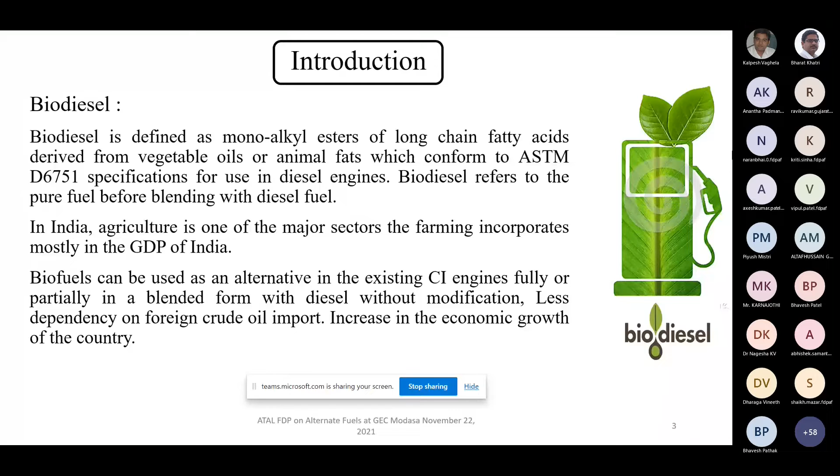However, the calorific value of biodiesel is slightly lower, but it is in the range of diesel. And there are several differences in the physical, chemical, and other properties because they are obtained from different seeds. Biodiesel has some merits, like no sulfur content compared to diesel. It is non-toxic, biodegradable, and can act as a natural lubricant as well.

And biodiesel has a slightly higher flash point and fire point compared to diesel, which makes it a safe fuel. So you can transport and store it easily. It will not catch fire at a lower temperature, having a higher flash point temperature.

Moreover, biodiesel reduces friction between engine parts, because biodiesels have slightly higher lubricity, which makes them more efficient as far as friction power or other friction loss is concerned. The production and adoption of biodiesel as a substitute fuel for diesel engines has 3 main benefits. One, it can reduce the economic burden due to petroleum products.

Second, it can decrease the emission of harmful gases responsible for the greenhouse effect. And third, it will make the life of common people better by giving them employment opportunities. So looking at these 3 advantages, we have taken up this study. And the main targeted point I'll discuss more is how it reduces emissions or greenhouse gases. In that way, this fuel is more important.

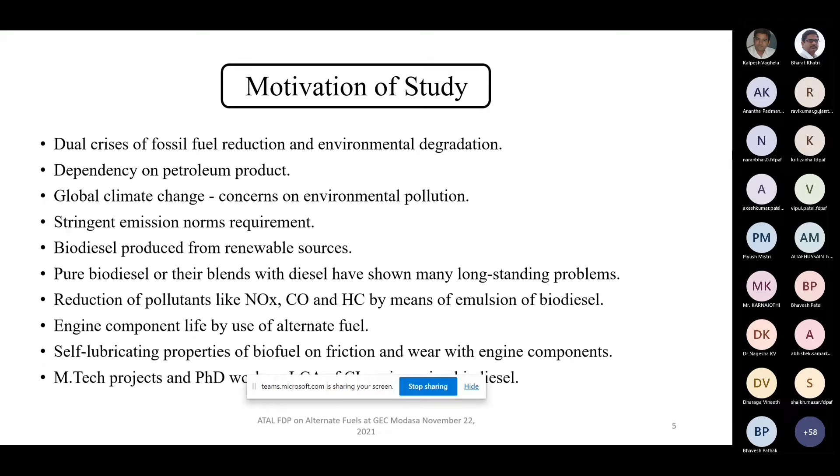As we look at the problem statement, in line with what we discussed, diesel and petrol are the most used fossil fuels and cause huge emissions. As I said, 20% is the contribution of transport fuel. The probable solution to this problem is to use alternative fuels, which produce environmentally harmful gases in lesser quantity. Biodiesel has many sources, and from these different sources, different biodiesels are obtained. And it is important to find the best possible combination of mixing two biodiesels, which can be used as an alternative fuel in automobiles.

So in this entire talk, rather than mixing a single biodiesel with diesel, I'll be highlighting the results with at least two biodiesels mixed with diesel, and the possible improvement in combustion and emission level as well. And I'll also discuss why we selected two rather than one biodiesel.

Next is the acidic content present in biodiesel and the high corrosion rate of metal in the long run in CI engines. Due to the high corrosion rate and acidic property, engine life reduces, and it affects the main components of the engine. So this study would be helpful. Working on all these problems, it has been decided to work on the corrosion property of biodiesel, to see if it can decrease the corrosion rate and find a suitable biodiesel which can be used in the long run in CI engines.

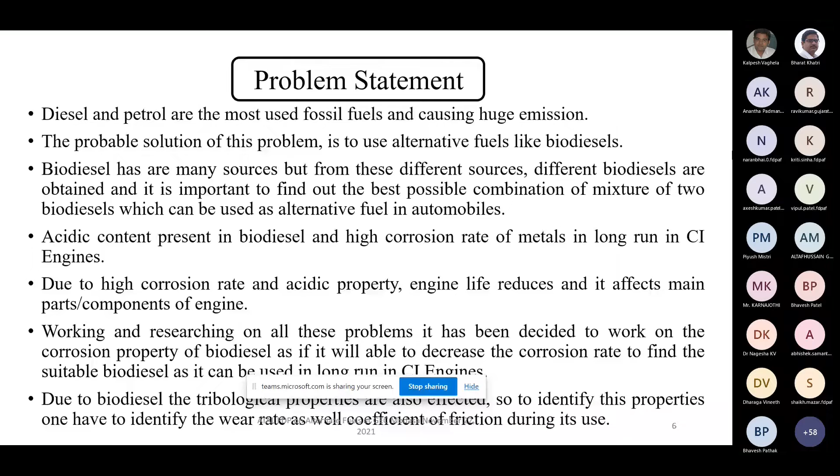So why we need to mix two biodiesels? One important point is less dependency on a single crop-based biodiesel fuel. At a given location, several seeds or crops may be available from which we can get biodiesel, reducing dependency on a single crop. Sometimes it could also be a seasonal problem, as a particular crop may not be available throughout the year for the entire region.

So depending on availability, whether seasonal or local variation, we can mix more than two biodiesels. As far as physicochemical properties are concerned, unlike diesel, all biodiesels have different properties. Some may have better density, some better lubricity, some are less corrosive, some give less frictional effect. If we know all these physicochemical properties, we can determine which two biodiesels are best to mix to get advantages in performance, combustion, and emission. Availability of biodiesel crop throughout the year is also one reason for mixing two biodiesels.

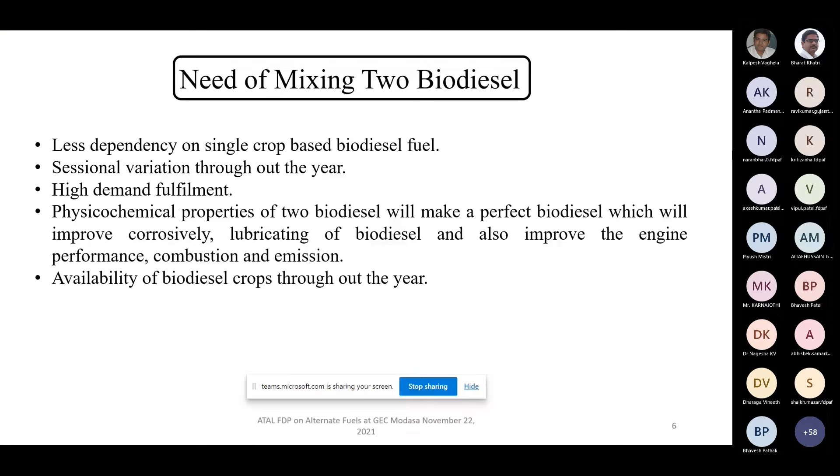So we did some literature review. I won't discuss in detail what literature is available, but to arrive at the final conclusion of this talk, we divided this session into 5 different topics.

A lot of literature was reviewed in terms of engine output with dual biodiesel, where we reviewed papers on the effect of dual biodiesel on fuel property and on engine output. However, we could not find much literature on this topic, though some is still available.

The second part of the literature is fuel optimization by multi-criteria decision method techniques like Promethee, TOPSIS, MOORA, AHP, ANP, VIKOR, etc. We focused on the first two, since a large number of biodiesels are available and we need to mix two - so which two, and why those two? We need to optimize that, and we did this optimization with the help of Promethee and TOPSIS. However, literature is available on other techniques as well.

The third part of the literature is on engine output with emulsified fuel. We tried to understand if we mix water, to the extent of 1 to 5%, in diesel, whether it could improve properties in terms of emission, performance, or combustion. So we reviewed literature on stability of emulsified fuel and its effect on engine output.

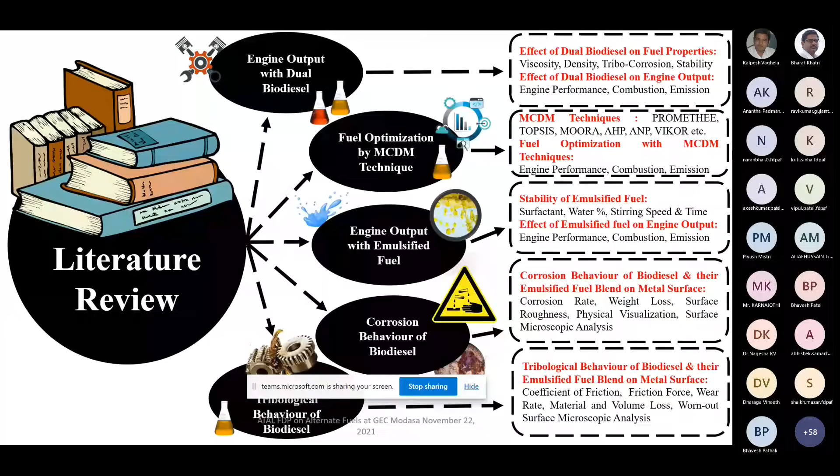So in a broad sense, the total literature was reviewed, and based on that we arrived at some conclusions. These conclusions are: optimization of fuel can be performed using multi-criterion decision making techniques based on engine output, and multiple mixing of biodiesel can reduce engine emission - this is also available in cited literature. Mixing various biodiesels will reduce dependency, and some crops of biodiesel are highly corrosive.

Mixing of various biodiesel will reduce the dependency. Some crops of biodiesels are highly corrosive. Biodiesels are more corrosive than diesel, and the corrosiveness of biodiesel can be reduced by blending them with low corrosive biodiesel - so if you mix it, the effect can be nullified.

Biodiesel has potential as a self-lubricating fuel or lubricant, and multiple biodiesel blend fuel has potential to reduce engine wear. However, with the addition of biodiesel in petroleum lubricant, it can reduce lubricating properties, and emulsified fuel combusts more efficiently, also producing higher brake thermal efficiency. These are some of the conclusions from the literature review.

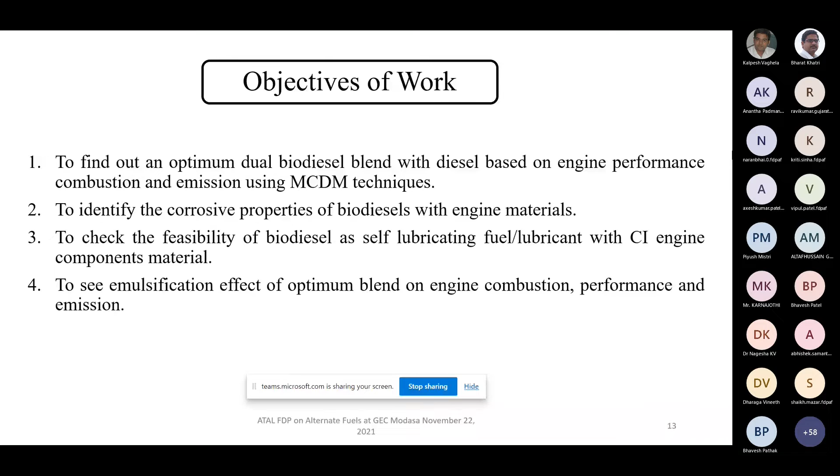So these are the 4 basic objectives. One is to optimize the blend based on our MCDM techniques. Then to identify the corrosive properties. Third is to check the feasibility of biodiesel as self-lubricating fuel in the CI engine. And last one is to see the emulsification effect - what if we add a slight amount of water into the engine on combustion performance and emission.

So first, as I said, the first part is the selection of biodiesel. If we want to mix them, we need to identify some biodiesel and then try to mix. So first we selected some biodiesel samples based on the property. They were analyzed through GCMS and FTIR based on availability and based on tribocorrosion or corrosion property from the literature. Some biodiesels were selected. Then all these biodiesel blends were typically analyzed through engine performance analysis - CI engine test on the CI engine test rig, performance analysis, combustion analysis, emission as per IS 10,000 part 4.

Then as I said, we add a slight amount of water, and again performance, combustion, emission analysis was targeted. Then with this blend of biodiesels, corrosion analysis was understood.

For that we selected the metal, then static immersion test was performed, and on the basis of visual inspection, weight loss analysis, and surface roughness through surface roughness tester and scanning electron microscopy, we identified the corrosion level in different metals as well.

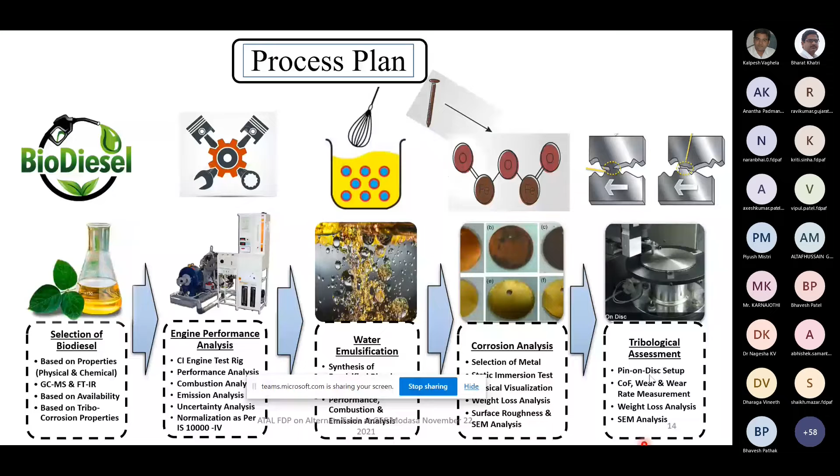And finally, we went on to pin-on-disc apparatus experimentation, where we found out the metal's affinity with the biodiesel in terms of coefficient of friction, wear rate measurement, weight loss analysis, etc. So this way we have moved from selection of biodiesel to finally tribological assessment or analysis. This is all about the selection of biodiesel.

So we know, different seeds are available from where we can generate biodiesel in different quantity in different states of India. If I talk about Jatropha, it's available in Andhra Pradesh, Chhattisgarh, Rajasthan. Castor in Gujarat, Rajasthan, Andhra Pradesh. Neem is available in plenty in UP, Bihar, and West Bengal. Linseed is available in Madhya Pradesh, Karnataka, Chhattisgarh.

Karanja is available in plenty in UP, Bihar, and Orissa. Same way, rapeseed is available in plenty in Rajasthan, Uttar Pradesh, Haryana. Palm in Andhra Pradesh, Gujarat, and Karnataka, and canola is available in Rajasthan, UP, and Haryana. So you see, different crops are available in different states of India.

If we generate biodiesel, it's difficult to transport it from one place to other, looking at the transportation cost. So normally we target the region-based or state-based biodiesel availability, and you can see in one state more than 2 or 3 seeds are available wherein we can generate the biodiesel. So we took these 8 different species from where we produce the biodiesel, and those biodiesel studies are further discussed in this presentation.

So this is physical chemical properties. Now you see here, more or less viscosity is in line with the diesel, but more important is the calorific value. Diesel's calorific value is about 42 megajoules, and almost all biodiesel calorific values are in line with diesel except Karanja and rapeseed, where this calorific value is slightly lower, and we know that if calorific value is less, your brake specific fuel consumption would increase. So you require more amount of fuel to get the same power. Density is almost the same - from canola to castor, the variation is much less.

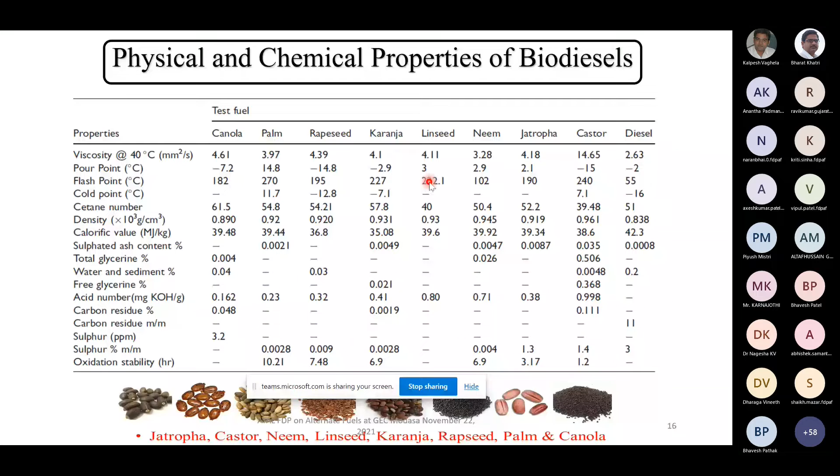So the first part of the talk is the selection of optimized biodiesel blend using multi-criteria decision method techniques. To arrive at the best blend, we started initially with all 8 biodiesels, whatever were presented in my earlier slide: Jatropha, castor, neem, linseed, karanja, rapeseed, palm, and canola.

These 8 biodiesels were selected and tested for 3 criteria. One is performance, where we selected brake thermal efficiency and brake specific fuel consumption. For combustion, we took maximum pressure and delay period. For emission, 3 emissions were targeted which are most crucial: NOx, HC, and CO. Based on that, we tried to optimize.

As far as engine load weightage is concerned, engine may run from 0 to 100% load, and most of the lifetime it runs at 50% load, and accordingly this weightage was selected. Finally, to arrive at which biodiesel is best, the parameters like performance, combustion, and emission were also given different weightage. More weightage is given on emission.

So 50% of the selection weightage was given on the emission criteria, 25% on combustion, and 25% on performance. We have 3 different indices for emission; total weightage is 50, so each one is given about 0.167. Combustion is given 25%.

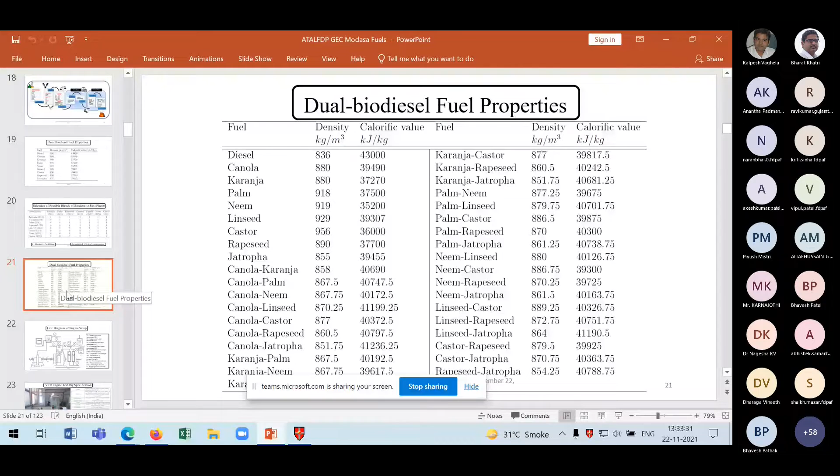This gives the property of density and calorific value of all these 8 samples.

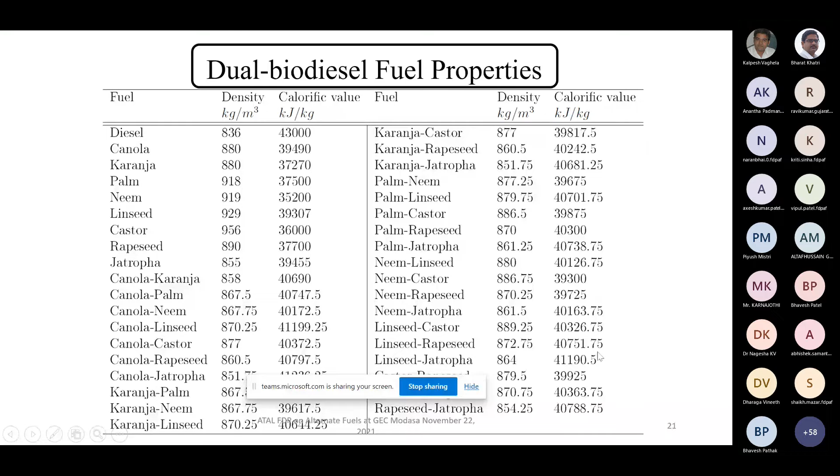So all these 28 combinations were tested. Here you can see, along with the pure diesel and pure biodiesel, the properties density and calorific value for the mixture are also mentioned. If you mix it, the calorific value has slightly gone up in some cases, because the calorific value of some biodiesel is more compared to others. Almost in all cases, the CV value is in line with diesel: if diesel has 43, here it is ranging from 39,000 to about 41,000, and density is also in line with the diesel.

This is our experimental test setup. It is a computerized variable compression ratio engine test rig, and here an electrical dynamometer is given. By varying typically the flow rate, all sorts of results were taken, and they were captured through an online data recording system as well.

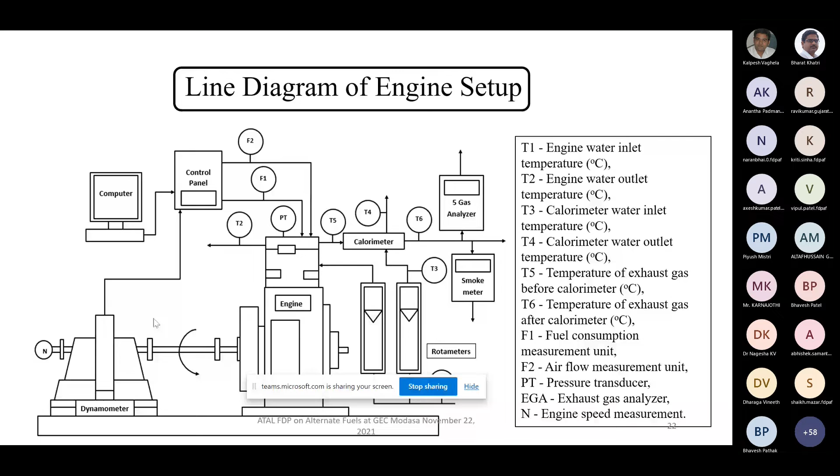This is the pictorial view of our existing VCR system, sorry, variable compression ratio engine test. For emission, we measure carbon monoxide, HC, CO2, O2, and NOx. This 5-gas analyzer was fixed in the tailpipe, and it could give us an accuracy of 5%. For smoke, we measure the opacity, and the accuracy is in the range of plus or minus 0.1 meter inverse. These equipments were used in the experimental setup.

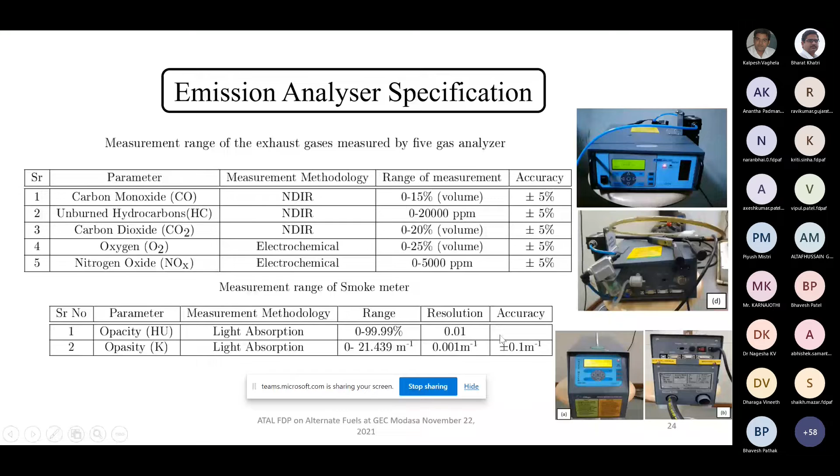Now, as far as load factor is concerned, as I said, we arrived at loading conditions from 0 to 100%. Here you can see that the maximum load factor is given to 50% load. That is, a 0.6 weight factor is for 50% load. A 0.15 load factor was given to 25% and 75% of engine operation. And we know the engine hardly operates at 0 and 100%, so this load factor was set as 0.05 and 0.05 respectively.

This is taken from the United States Environmental Protection Agency standard, where they have mentioned that the engine load factor is typically 0.59 for most of the time of the entire life. In line with that, we have selected 0.6 for 50%.

As far as the engine operating condition is concerned, our engine was fixed at 1500 RPM. Loading condition was varied from 0 to 100% in intervals of 25. Injection timing was 20 degrees before TDC. Temperature was about room temperature, 25 to 30 degrees centigrade. Compression ratio was fixed at 18:1. However, we have flexibility in our engine setup to vary the compression ratio from 16 to 19, because it is a variable compression ratio engine test setup. Injection pressure was set at 220 bar.

With this, we used these 28 combinations, as I said, from canola karanja to rapeseed jatropha. Our target was to select the best mix out of these, so that we can take 25% each of two biodiesels along with 50% diesel. In most of the literature, it will be 80% diesel and 20% biodiesel. But here we have targeted 50% diesel and 50% biodiesel, wherein two biodiesels were mixed in a quantity of 25% each.

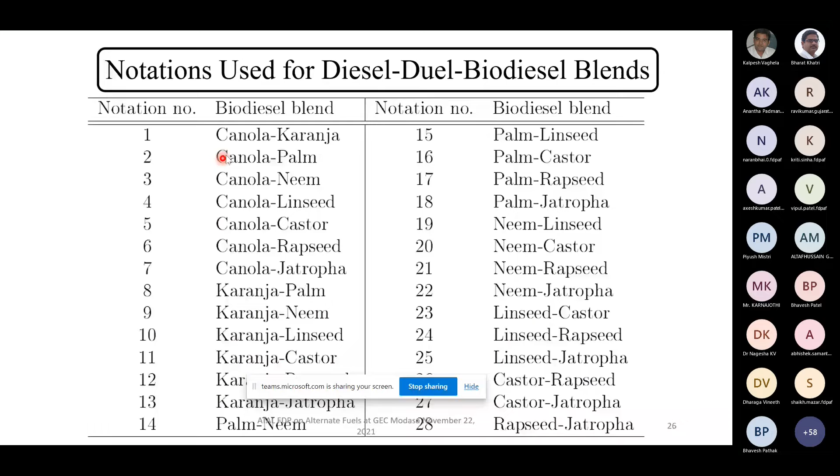If you look at the performance analysis of each individual combination, on the x-axis you can see 1 to 28, in line with the notation numbers given in the previous slide. 1 corresponds to canola karanja and 28 corresponds to rapeseed jatropha. This is the performance analysis, where we took two different indices: brake thermal efficiency and brake specific fuel consumption.

The maximum efficiency was with biodiesel mixture 19, which is neem linseed. You also have better results with number 5, canola castor, and number 9, karanja neem, and the lowest was with 25, linseed jatropha. Through this we come to know that some biodiesels give brake thermal efficiency of the order of 25%, while for other biodiesels the efficiency is less by 5%, in the range of 20 to 21.

Then we went for the combustion analysis. Here the delay period should be lower, whereas the peak cylinder pressure should be more. Ultimately, more peak cylinder pressure will give you more torque, and your brake power would be more. At the same time, the delay period should be shorter.

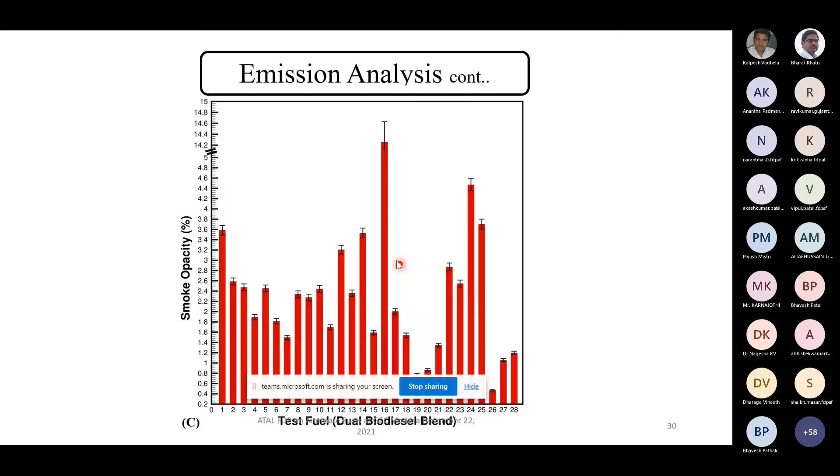In emission also you see here number 26, that is the castor rapeseed, has got the lowest. 19 and 20, that is neem linseed and neem castor, also have better property in terms of the smoke opacity emissions. Now here the weightage for the smoke opacity is 16%, hydrocarbon emission also 16%, 16% for nitrogen oxides. So this is my overall matrix.

If you see whatever I have described, the weightage for total emission is 50%. Okay, so this weightage is fixed, as discussed earlier. However, in terms of the emission, lower is better. We should have low emission, but at the same time, as far as Pmax is concerned, it should be high. Delay period should be low and thermal efficiency should be high, right? So for some of the parameters lower is better, for some higher is better.

So ultimately, see this weightage, right? Weightage is given for the different criteria, and whatever results were highlighted in these 7 charts are mentioned over here in numbers. For all the alternatives A1 to A28: the emission level in ppm or percentage, Pmax, delay period and thermal efficiency. Interestingly, you can see that I have not mentioned brake specific fuel consumption, since thermal efficiency and brake specific fuel consumption go hand in hand: higher brake thermal efficiency means lower brake specific fuel consumption. So thermal efficiency is given 25% of the weightage. So this is the total matrix for all 28 combinations.

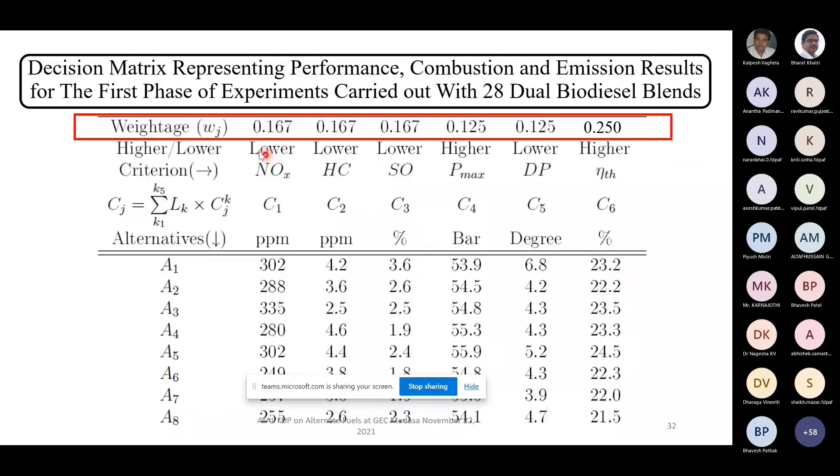So ultimately what I am doing is multiplying r, which is the revised number, with the weightage factor. So all these weightages w1 to w7 are multiplied, and you will have the weighted normalized decision matrix. Then this particular matrix will have 7 columns and 28 rows. So out of these 28 numbers, you can find one number which will be maximum and one number which will be minimum.

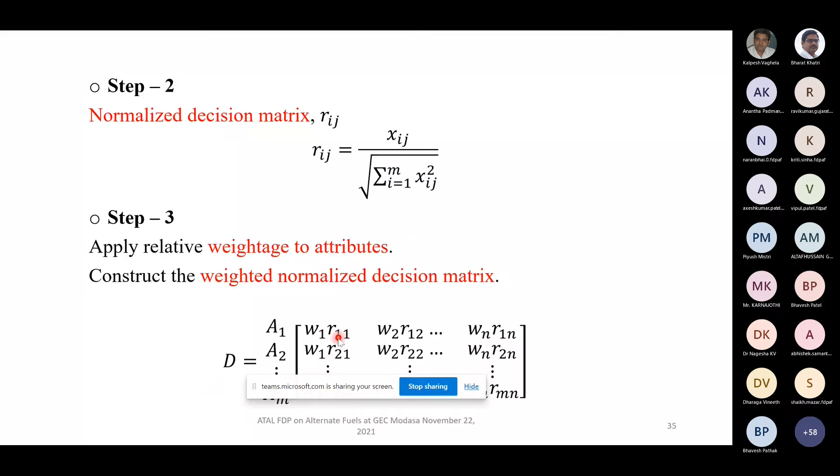So we need to identify this A plus and A minus. A plus is typically the maximum number in the given column, out of these 7 columns. So you have 7 maximum and 7 minimum, which will be marked as A plus and A minus. And then with respect to that, we'll perform this Vij minus Vj, take the square, and make the summation of that.

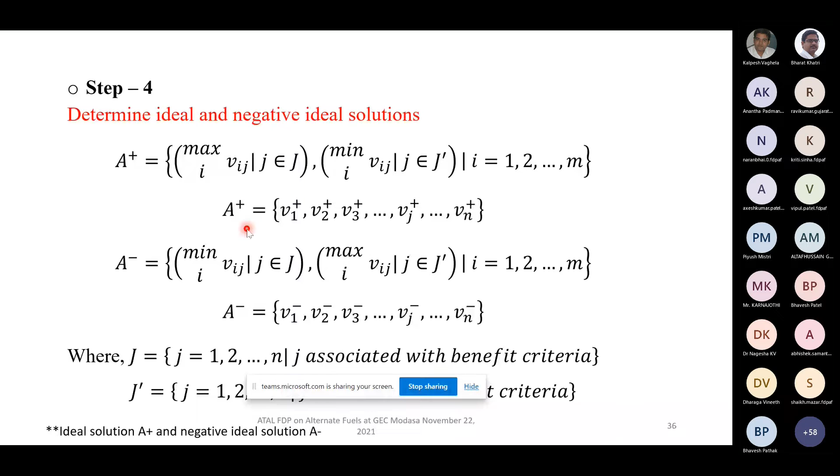So whatever matrix you have, you take the A plus. A plus covers all your 7 results in this matrix. Whatever is the maximum number will be A plus, whatever is the minimum number will be A minus. So at the bottom of this A28, I have A plus and A minus, and correspondingly I have 7 results. Then every individual number will be subtracted from this A plus or A minus, and then we'll take the square root.

So you see here, Vij minus Vj, I am going for the ideal negative and positive separation. When I subtract all the 28 cross 7 elements from Vj plus, square it and take the square root, you will get a single number with respect to that particular column, which will be Si plus, and similarly you will have Si minus as well. So we get the calculated separation from the ideal positive and ideal negative solution.

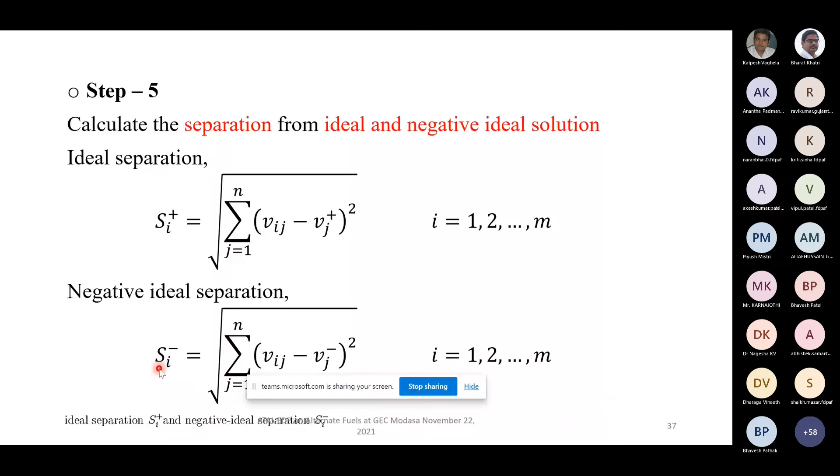So you have one set of matrix as Si plus, one as Si minus, and using these two I'll have a single matrix of Ci. This Ci will be a one-column matrix having 28 rows. Every individual combination A1 to A28 will have a particular Ci, and here you can see all 28. Finally this C star will be a single number for a given alternative; the maximum will be the best alternative, and the minimum will be the least one.

So using this TOPSIS, I can conclude that combination number 26, which is my castor rapeseed, is the best solution. Second best is Palm Linseed. Third best is my A17, which is Palm and rapeseed. And likewise, I have numbers from 1 to 28, so you can put all these 28 blends in order.

So using this multi-criteria decision matrix, the TOPSIS method, I have arrived at the best possible solution, that number 26, castor rapeseed, is the best, given that 50% weightage is given to emission, 25% to combustion, and 25% to performance. So with all that we have discussed so far, various experimentation and various matrices, I could arrive at the ranking from 1 to 28 by the TOPSIS method.

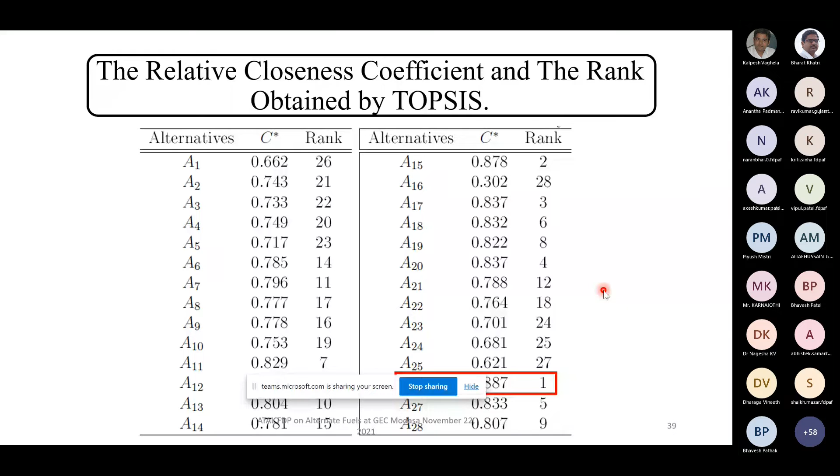However, we should ensure that our ranking from TOPSIS is not biased, so we took another method as well. The next method is PROMETHEE, the preference ranking organization method for enrichment of evaluations, which is again a matrix-based method. I'll not discuss the steps involved, but typically we go for the matrix formulation, and arrive at the multi-criteria preference index matrix for all

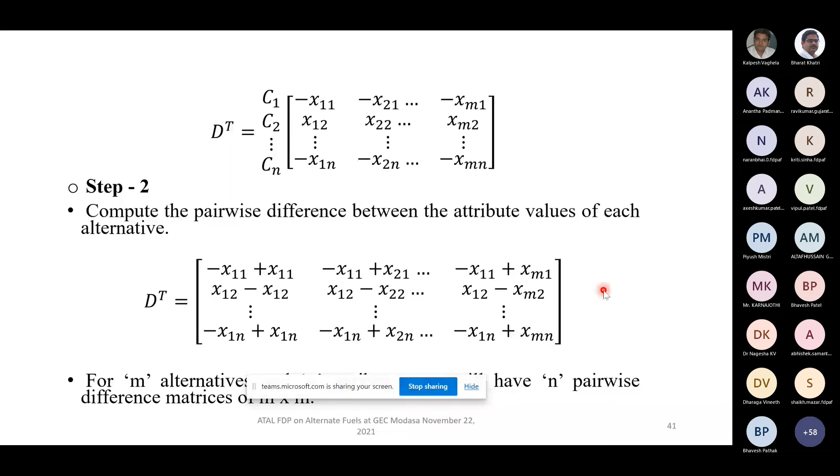28 combinations. Then in step 3, we perform the multi-criterion preference index, then the outranking and outranked index, and finally we arrive at a single number here, just as C star was your ranking decision performance parameter.

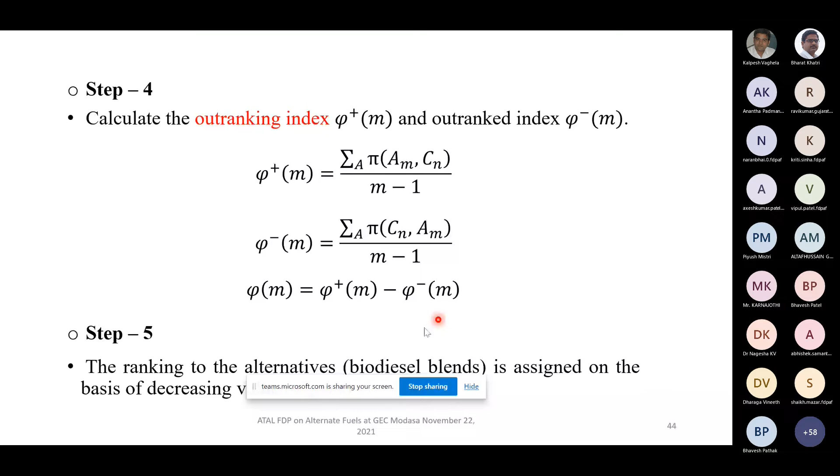Here this phi-m, which is the outranking and outranked index, on the basis of that we arrive at a single digit number phi-m for the given option. And if we put this phi for all these combinations, whichever is having the highest phi, highest performance, would be the best matrix.

So again, ironically, we got the same, that is blend number 26, which is castor rapeseed, as the first rank. However, it is not true for the others, that is second, third, fourth, fifth, etc. There is a slight change. Whatever was second in the earlier case is not the second over here. You can see now second best is neem linseed, whereas in the earlier case it was palm castor. So here using PROMETHEE and TOPSIS, we got the ranking of these 28 blends.

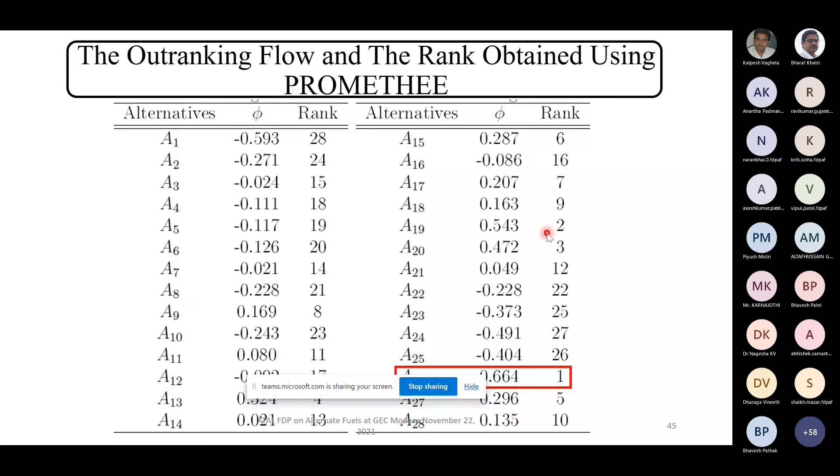So if you have two different values from two different criteria, the Spearman rank correlation method gives you the optimum solution. It is indicated by rho, and the value will be in between -1 and 1. If rho value is -1, it gives you poor correlation. If it is +1, it gives good correlation. So if your correlation is more than 0.8, 0.85, we accept that particular correlation. Otherwise, we reject.

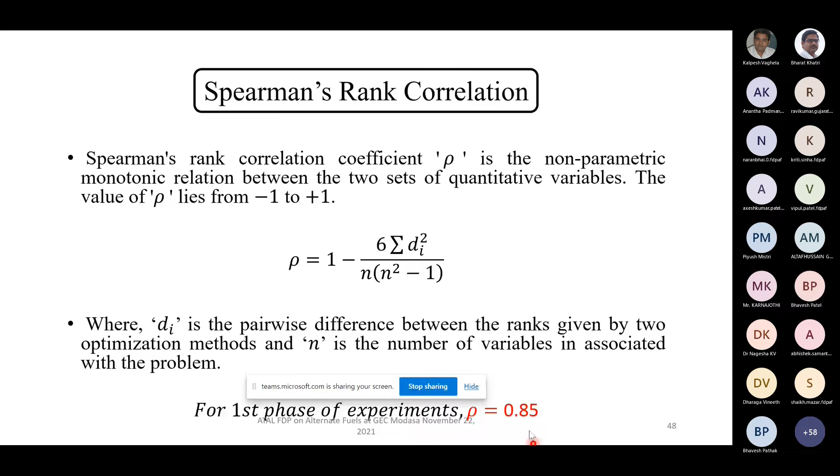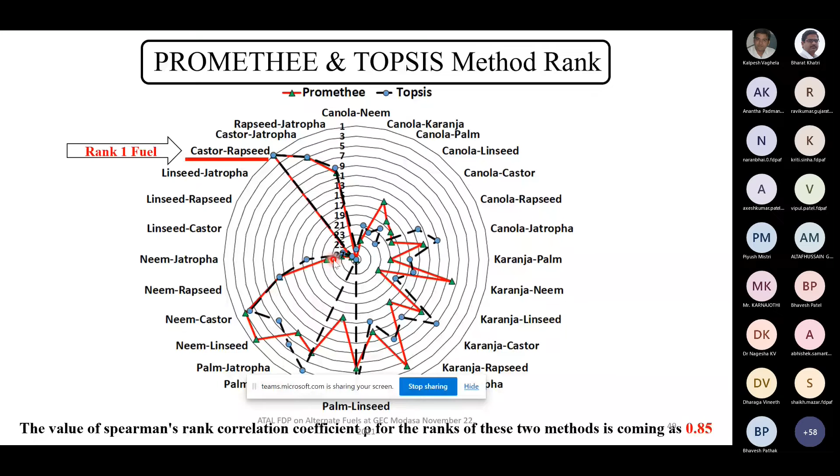So if you see here, as I said, in order to perform the further experiment, it was decided that this particular mixture of castor and rapeseed will be varied. Because we need to find out what is the correct mixture, whether we should take 50-50% of these two, or 20-80% or 40-60%.

So 5 different scenarios were selected. For instance, we take diesel blend as 70% fixed, but as far as this biodiesel blend is concerned, it was taken as 30. Looking to the fact that this mixture would give us better flexibility, rather than establish an 80-20 blend, here we went for the 70-30.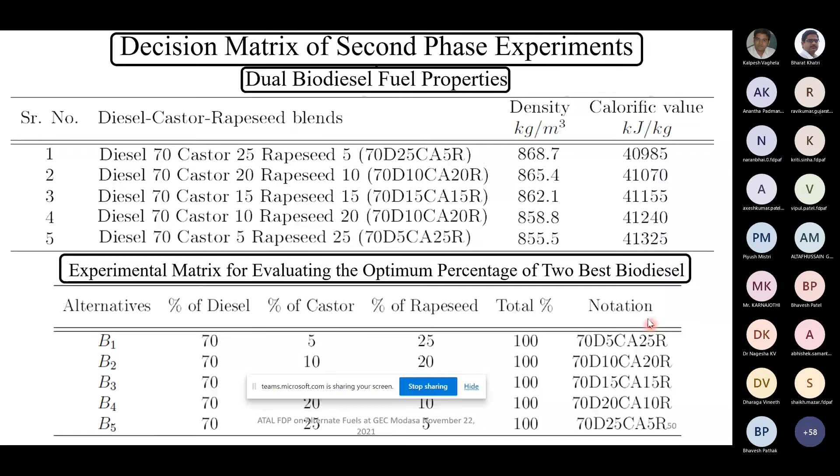Now here in the second phase, I'll try to optimize the proportion of these two, whether it is 15-15 or 5-25 or 10-20. So again, the same criteria were selected: performance, combustion, and emission. Performance analysis straight away says that B5 is the best. Your brake specific fuel consumption is the least, whereas the brake thermal efficiency is more. And B5 is 25% Castor and 5% Rapeseed. This is best in terms of performance.

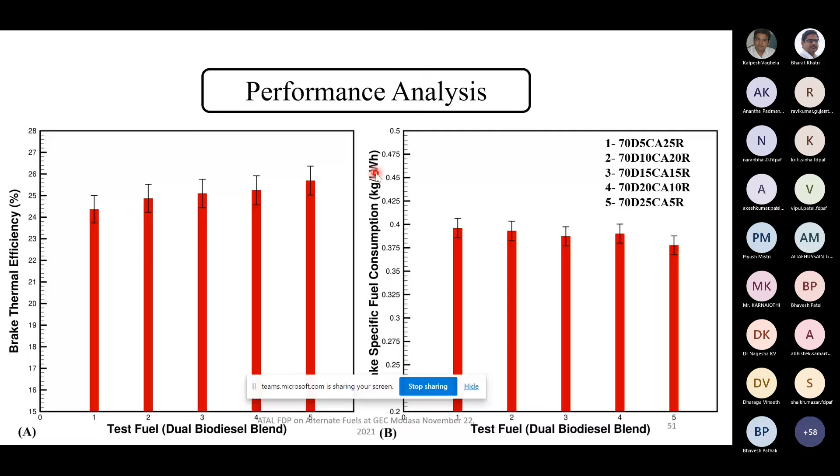In terms of combustion, my delay has to be minimum and peak cylinder pressure has to be maximum. So minimum delay is with respect to B1. So looking at the delay period, or combustion analysis, 70% diesel, 5% Castor, and 25% Rapeseed is the best. If I go for the emission, see here.

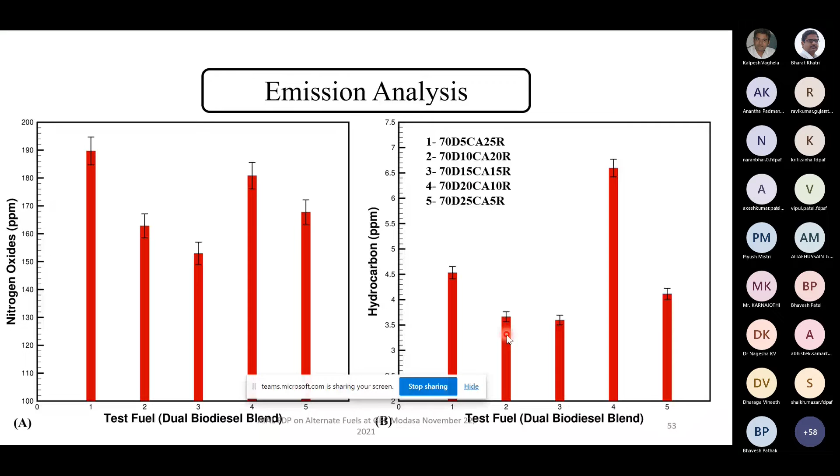In emission, typically 3 criteria are selected: NOx, hydrocarbon, and opacity. In terms of nitrogen oxide NOx, the 15-15 blend is better. In terms of hydrocarbon also, the same blend is better because it gives the least value, because in emission lower is better. And for smoke opacity, the third criterion, it is also better. So again, same criteria: 50% weightage is given to emission, 25% to combustion, and 25% to performance.

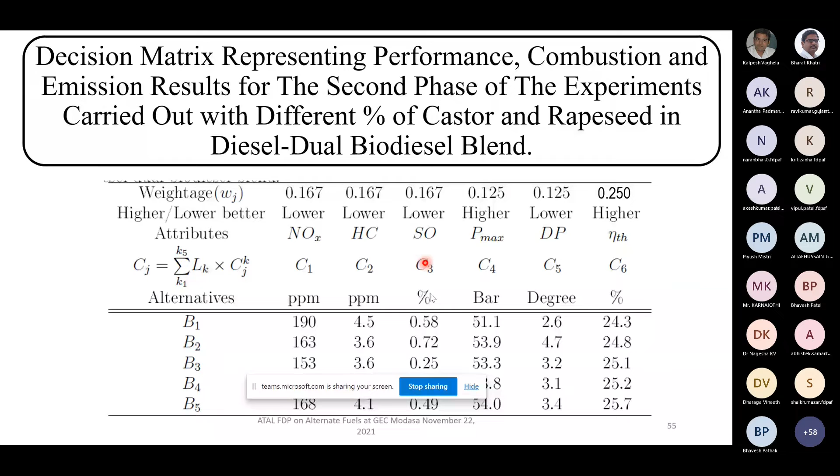Based on that, matrices were formed, both methods, PROMETHEE and TOPSIS, were implemented, and ranks were identified as per the previous methodology. So out of these 5, B1 is ranked 4th as per TOPSIS, whereas PROMETHEE ranks it 5. The difference is 1. We take the di square because for the Spearman rank coefficient we need to use this particular column. For these 3, the difference is 0. That means both methods have given the same optimized blend. Only for the first 2 does the rank differ, by only 1.

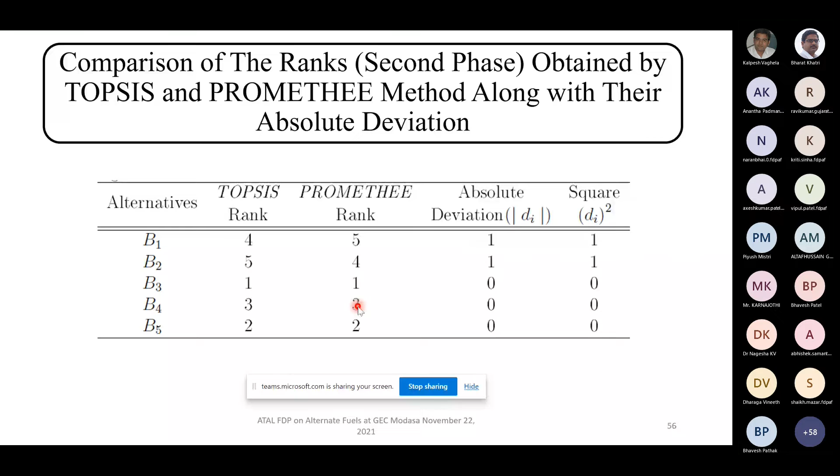So TOPSIS and PROMETHEE for my second phase of optimization give more or less the same results, represented over here. The best blend is 70% diesel, 15% Castor, and 15% Rapeseed, whereas the worst one is 70% diesel, 10% Castor, and 20% Rapeseed. So this second phase of optimization gives me the required mixing in my diesel biodiesel blend: a 70-30 blend, 70% diesel, 30% biodiesel, and in that 30%, 15% Castor and 15% Rapeseed added in equal proportion.

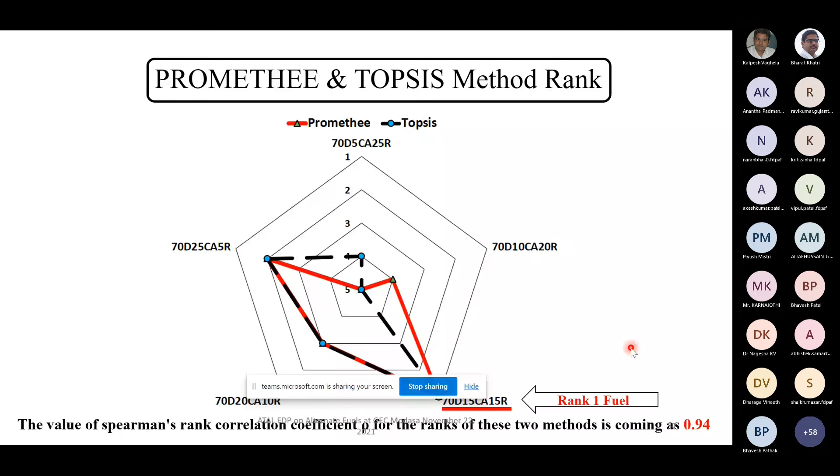And the Spearman rank correlation is 0.94, which is towards 1. So PROMETHEE and TOPSIS are both equally strong to optimize my second phase of experimentation. We went for the uncertainty as well, and the uncertainty is very good in almost all measurements, very low, less than plus or minus 0.1. In percentage also it is very low. So the equipment was calibrated, and uncertainty in measurement was within limit.

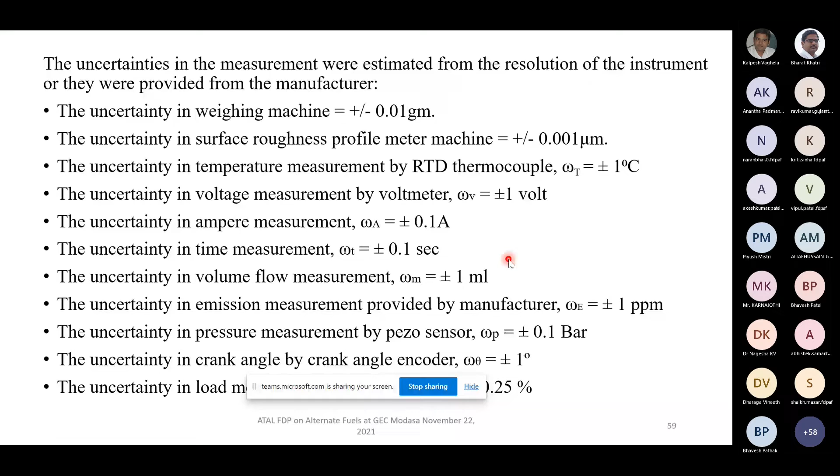As far as the closure of this part is concerned, we did the selection of the optimum blend of biodiesel and diesel based on a multi-choice decision matrix criterion, which gives us 70% diesel, 15% Castor, and 15% Rapeseed as the optimized blend, since it gives lower NOx, lower soot particle, and lower HC as well. Now we need to understand what happens if we go for further modification, the next modification being emulsification.

As far as emulsification is concerned, it is adding water into the biodiesel diesel blend. So henceforth, when I talk about biodiesel, please understand it is a blend of 70-30, where Castor and Rapeseed are mixed equally. So 70D, 15Ca, 15R will now be taken as my biodiesel diesel blend for the further study.

So the next study is water-in-oil emulsification. I add water into the oil, and we will see what happens if we add water into the oil, or water injection in the diesel engine - how could it be useful, what are the ill effects or negative effects, and whether we should go for that or not.

As far as the injection of water, or rather the water emulsification, is concerned, there are 3 ways. Either you can prepare the water-oil emulsion outside the engine, and then inject water and oil through your diesel injection system.

Second is the fumigation of water into the intake air, so along with the air, water is injected and mixed with the air as H2O vapor, and then it is injected into the diesel engine. Third is direct injection into the combustion chamber with the help of an injector.

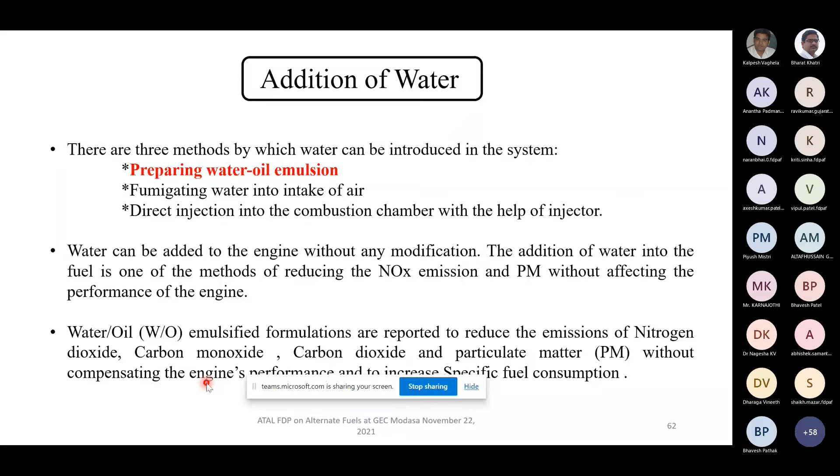So the mixture of water and oil, this emulsified formulation, is reported to reduce the emission of nitrogen dioxide, carbon monoxide, and particulate matter, without compromising engine performance much, and without increasing much of your brake specific fuel consumption. So this is overall the representation of the experimentation of this second phase.

I took the Castor and Rapeseed optimized blend at 15 each, 70% diesel, and then added some water in volume percentages of 1 to 5% and 10%. I'm writing 1-5 because we took 1%, 2%, 3%, 4%, 5% in steps of 1, and then directly went to 10%. We did not take 6, 7, 8, 9. So a total of 6 water samples were selected - 1 to 5% and 10% - and then mixed with this particular mixture.

Now, water and oil density is different, so they will not mix in the required proportion - rather you'll have a demarcation of water in oil, because water being heavier than oil will float... actually water will settle and oil will float. So to have a homogeneous mixture, we need a surfactant, and the function of the surfactant is to create a homogeneous mixture of water in oil.

So we selected 2 commercial surfactants, Tween 80 and Span 80, because of their different properties, and mixed them in some proportion with these 3 components. It was stirred at typically 1500 RPM for 48 hours so that the mixture is appropriate, and then left for 48 hours to check whether the mixture was appropriate, followed by the stability test, then performance test, combustion and emission.

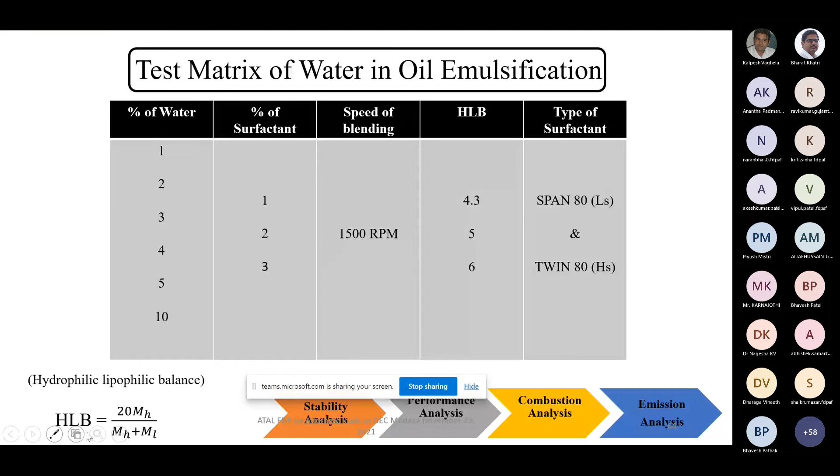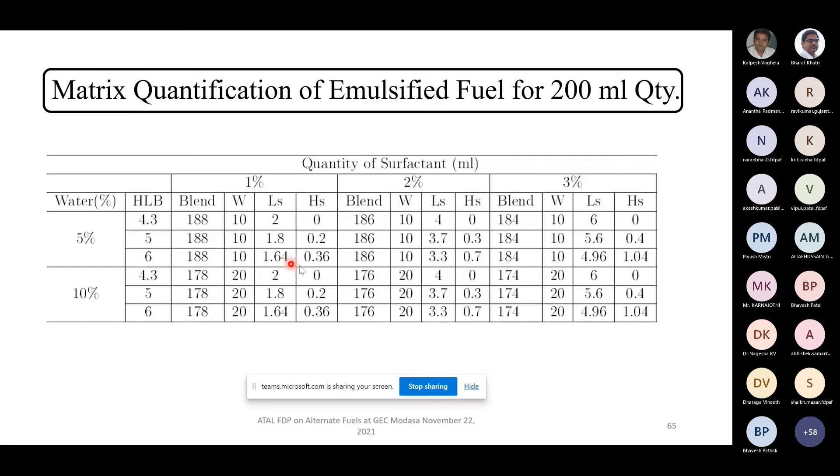To get HLB as 6, I need 1.6 ml of lipophilic surfactant and 0.36 ml of hydrophilic surfactant, so total is about 2, and this is out of 10, so the rest will be my blend. So the blend is varied accordingly. Total volume minus water and surfactant, 200 minus this, will be your blend. So all blends were prepared accordingly and the experiments were carried out.

So this is the property of surfactant. As I said, these are the commercial names, Span 80 and Tween 80. However, they are basically mixtures of carbon, hydrogen, and oxygen in different proportions. Molar mass, appearance, density, and boiling points are mentioned here. These are the two widely used surfactants in the industry for the stability of this mixture.

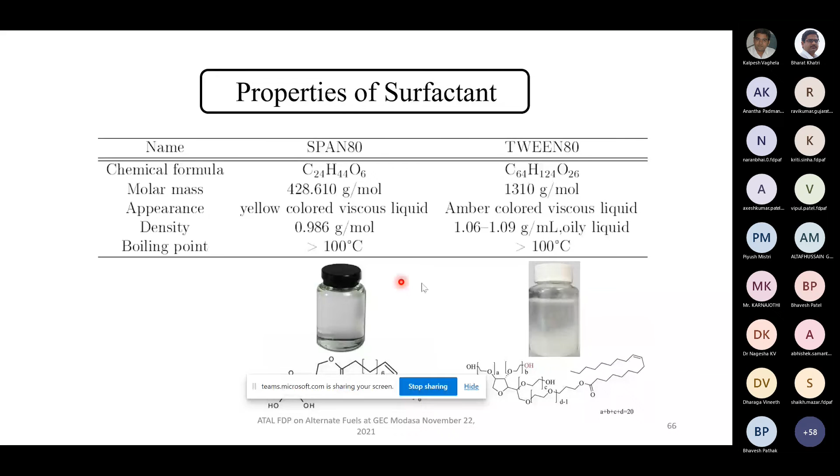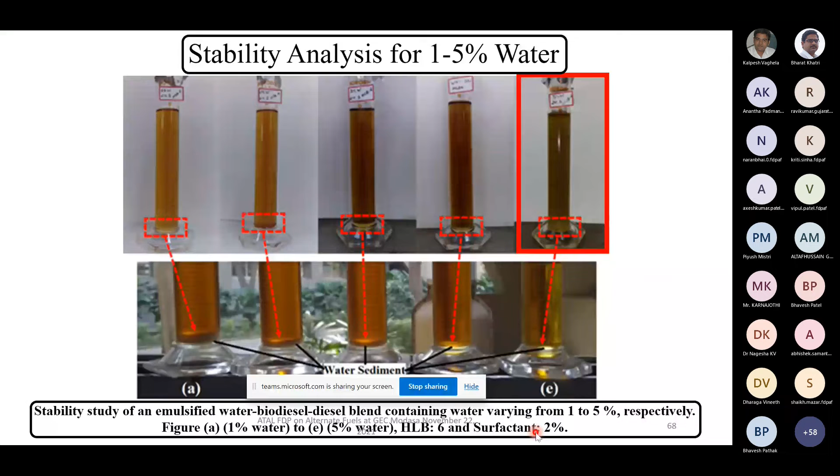However, we need to go for performance combustion, etc. For that, we need the properties of all this mixture. Here you can see all 5 mixtures: 1% water, 2% water, 3%, 4%, and 5%. Wherein these 2 and 6 were common, right? 2% of your surfactants and the HLB ratio of 6 was kept same. This second indicates 70% diesel C15, that is Castor 15 and Rapeseed 15, and first one is the diesel. So all values, viscosity, density, calorific value, flash and fire point, cetane number, etc. are mentioned. Let me clarify that here.

See, with respect to the neat biodiesel, if you find out the cetane number comparison, this cetane number is very good in line with the cetane value of your diesel. So that delay period hardly matters as far as this is concerned. So it is good in terms of that.

As far as calorific value is concerned, almost all these 5 blends have the calorific value more or less same. However, with the increase in water percentage, your calorific value goes down because water doesn't contribute to the calorific value. And viscosity is also in line, that is 16.99 to 16.90. Slight variation in viscosity you can observe, but it is negligible, and so does your density as well.

So these are the different fuel blends which were tested. 7 samples were tested, and this is the composition. As I increase the water percentage, obviously this blend value will be 100 minus addition of these two. So typically 1% water, 2% surfactant, 100 minus 3 is 97, so 97% blend will be taken. Here it is 5 plus 2, 7, so 93% blend will be taken. So these are my compositions for different blends.

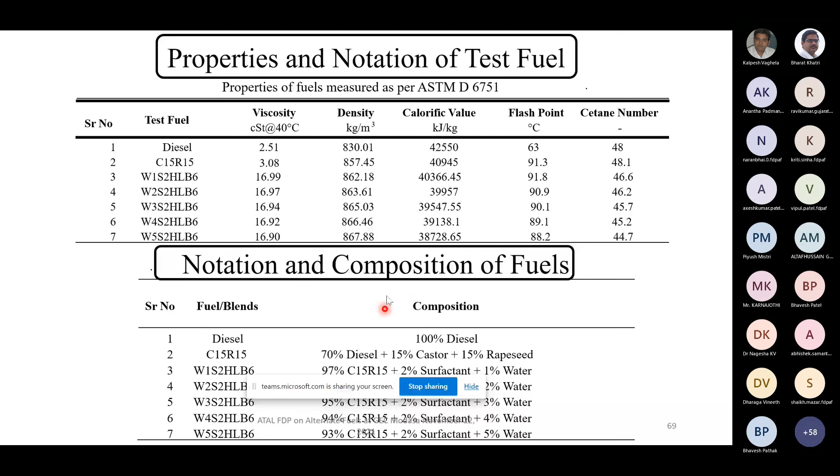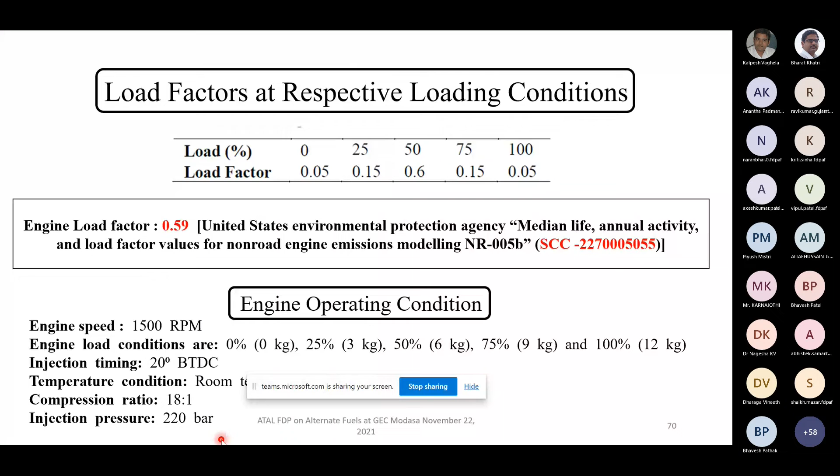Then same load factor was taken, looking to the fact that most of the time engine runs at 50% of load. Conditions were maintained same. And more importantly, I would point out that when we add water into the oil, what actually happens? Why should we add water in a smaller quantity? In the emulsified fuel engine, the water has a lower boiling point compared to diesel. Water boils at 100, but diesel doesn't.

So during the combustion, compressed heated air in the combustion chamber transfers heat to the water droplet along with the atomized primary fuel. So here you see there will be a fuel droplet. Water droplets are captured over here within the fuel. Both are having different boiling points. Boiling point of water is less, so it will pick up heat faster and there will be a blast. So rapid evaporation of the water will break down this whole particle into smaller particles.

So your larger fuel particle has fragmented into smaller fuel particles. From a surface area point of view, the surface area of a larger droplet is fairly less compared to the total surface area after fragmentation. So your heat transfer rate would be faster. So in order to increase this, this would be better in that term. This rapid evaporation explosion gives you more thrust, and sometimes we observe that your brake specific fuel consumption increases because of water percentage, but at the same time brake thermal efficiency also increases because of the thrust provided by this blast.

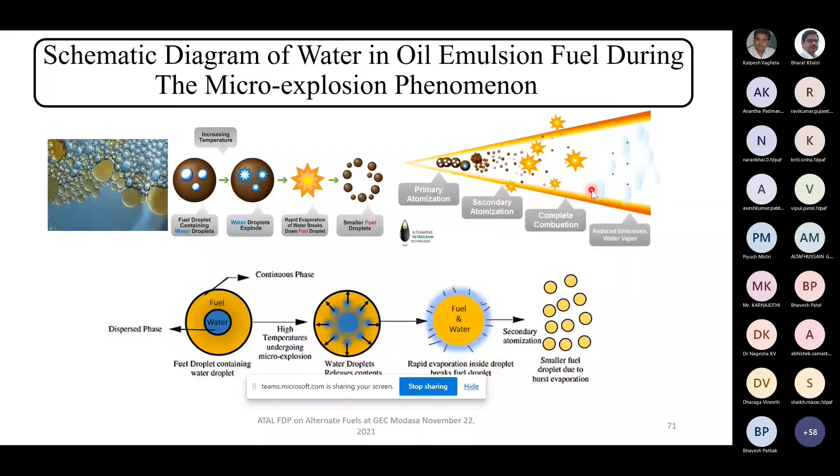So this whole process is divided into 4 steps: primary atomization, this fuel droplet with water droplet over the fuel; then secondary atomization, where typically these droplets are formed, and that gives the higher heat rate, and ultimately it reduces the emission. Because of this particular high heat release, your combustion would be perfect and the emission would be less.

Important thing is, if you see peak pressure, which happens 20 degrees after TDC, it is almost in between 370 to 380 for all the mixtures. However, the diesel will give you maximum peak cylinder pressure, and peak cylinder pressure reduces as you go on increasing the water percentage.

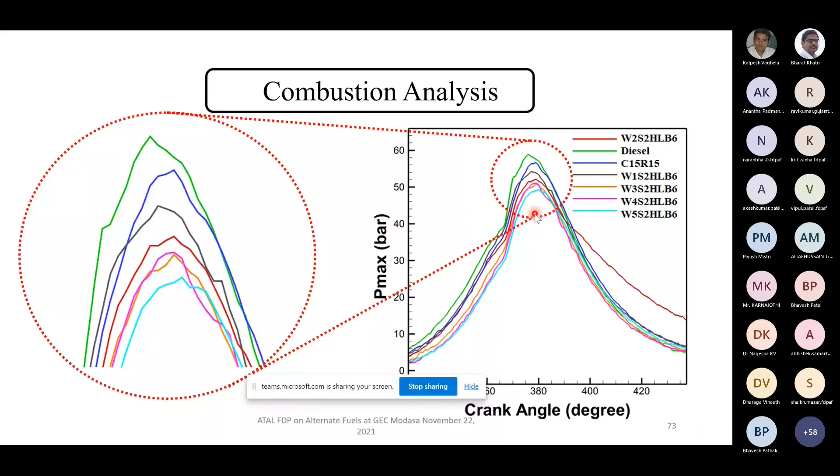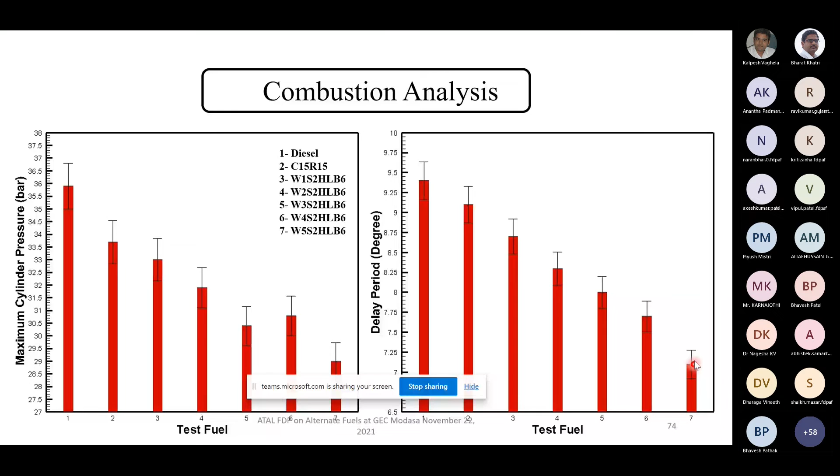If I talk in terms of the cylinder pressure and delay period, in terms of cylinder pressure, diesel is better, and the 5% water mixture is the worst because peak cylinder pressure is less. But at the same time, the delay period is shorter with my 5% water, 2% surfactant. So it gives me the opportunity to select this particular fuel in terms of the delay period.

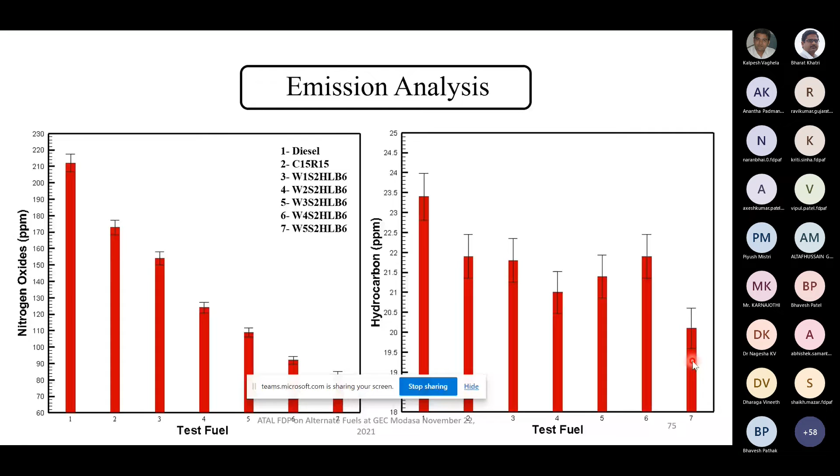In emissions, as we have discussed, because of the secondary atomization, water particles are fragmented and the heat release rate increases. So obviously here you will have better control over nitrogen oxide and hydrocarbons. It is a similar trend: as you increase water, your nitrogen oxide decreases. Here also you'll find that in most cases your hydrocarbon has gone down, and only smoke opacity, because of water particles, may contribute to some smoke. So smoke opacity has gone up.

So putting all these values, giving all this weightage, and if we summarize, the 7 would be the better. Again, this optimization is done with respect to the load factor. These 3 are contributing 50%, this is 25%, and these two are 25%. So again, you may apply PROMETHEE-TOPSIS, and you will get the best result with 5% water, 2% surfactant, and HLB ratio of 6. So our final blend is 93% diesel biodiesel mixture with 5% water and 2% surfactant. In that 93% diesel biodiesel blend, rapeseed and castor are taken as 50-50%.

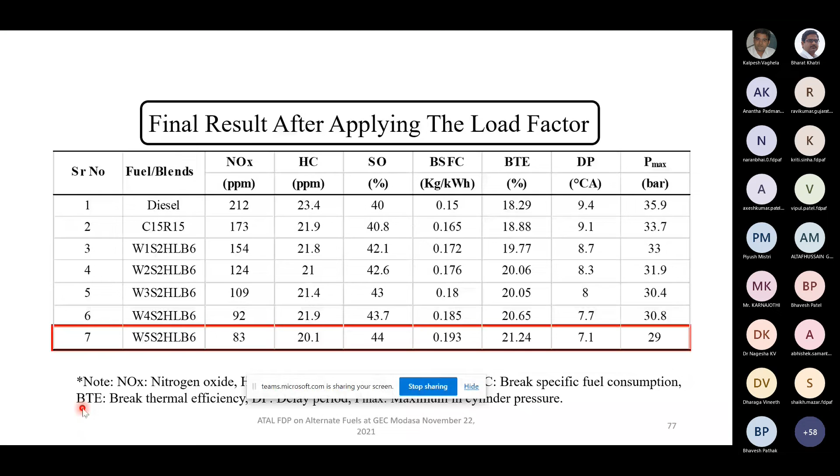In the next part, we will discuss the corrosion effect of this particular blend, that is 5% water, 2% surfactant, with the rest biodiesel diesel. First we'll discuss the static immersion test. So this is the corrosion analysis. Having optimized our biodiesel diesel water blend, we need to understand how corrosive our engine parts are with respect to all these test fuels, whether this corrosion is more or less in the optimized blend in comparison to the neat biodiesel, for which we have taken these 8 particular cases.

Over and above these 8, we'll go for 2 more: our optimized blend in terms of diesel and biodiesel, and optimized blend in terms of water, surfactant and biodiesel. So rather than 8, we now have 10 plus 1 diesel, 11 base cases. The first step is the selection of biodiesel. Then 5 metal coins, or rather metal parts, were selected, and the study was carried out on how these metal coins corrode with respect to these samples.

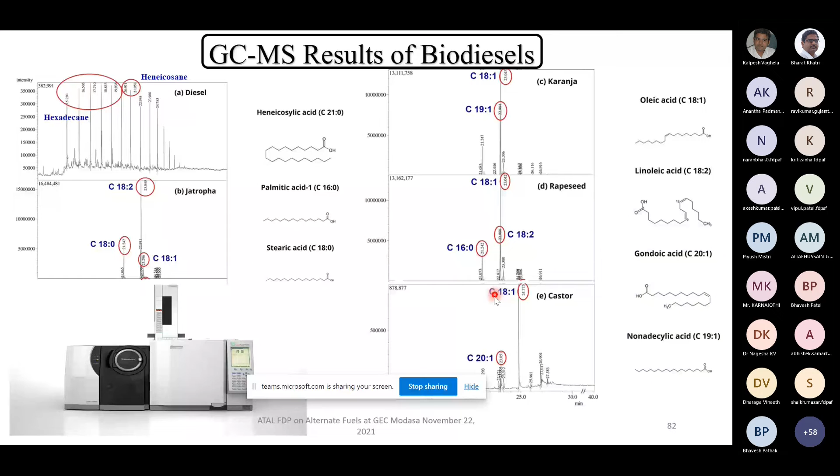So here, see, the complete analysis is given. These components are present in the test fuel. If you see, all 8 test fuels are mentioned. So higher molecular weight acids like heneicosanoic or gondoic acid, etc., are present in canola and palm, which are absent in rapeseed. So basically, rapeseed, linseed, jatropha, even castor to some extent, are those in which higher molecular weight acids are not present. So they tend to corrode the metal component less. Clear? So this analysis is important in that perspective.

Next point was which engine parts are to be selected. So we analyzed the different components and which metal is typically used to fabricate that particular component. Like the injector is made of stainless steel, your piston is aluminum alloy, right? Then the injection pump is mainly aluminum or copper based alloy. You have this low pressure line which is made of synthetic rubber. Then some of the parts are made from rubber hose, steel, right?

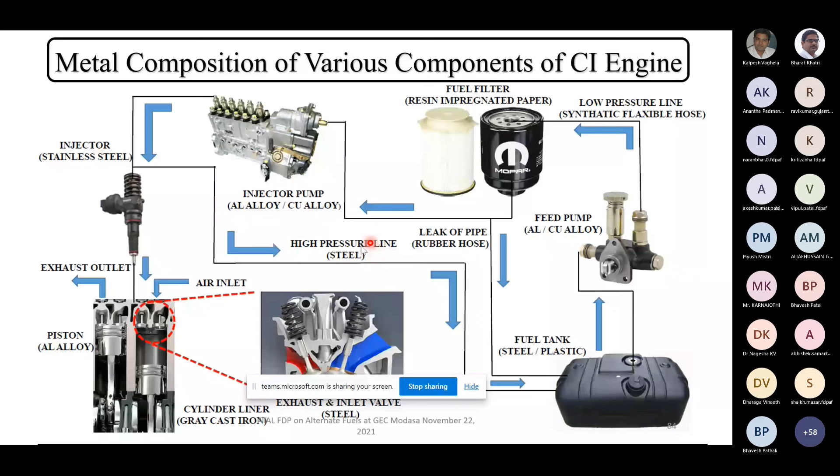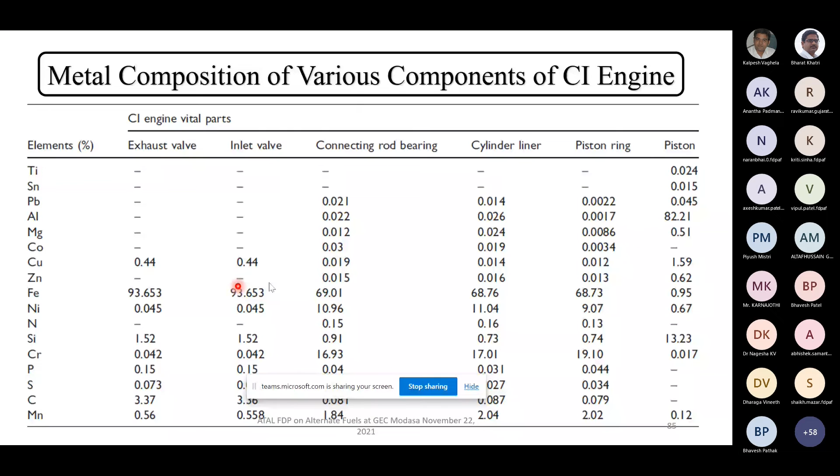So looking to this fact, these are the engine elements: exhaust valve, inlet valve, connecting rod bearings, cylinder liner, piston ring and piston. These are the main parts and these are the main elements. You see ferrous is present in almost all, copper based alloy also in almost all. So these 5 metals were selected based on their use in the fabrication of the various engine components: aluminum, brass, bronze, copper and iron. And this is the composition weightage, right?

We tried to maintain this particular composition weightage, and in order to find out whether these metals, when exposed to different biodiesel, are corrosive in nature or not, we need to expose these metal parts to the given biodiesel for a fairly long time. So we selected 500 ml of oil. 500 ml of all these 8 samples were taken in a beaker, and then we prepared a coin. You see here, this is a coin of the same dimension. An 18.5 millimeter diameter coin was selected.

Now these are obtained from ASTM standards, right? What could be the test methodology for this corrosion? So 18.5 mm is the diameter, which gives about 5.957 square centimeters area. And these coins were dipped in the sample, or rather hung with the help of a Teflon string, right? And they were exposed for 150 days. So this was a very long experiment.

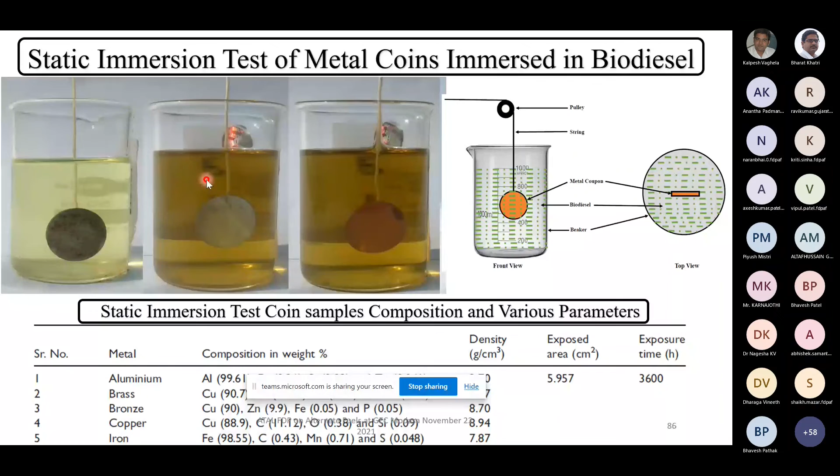So we kept all these 5 metals in 8 samples, including a 9th with diesel, a 10th with the optimized blend, and an 11th with water and optimized blend. All 11 beakers were prepared and kept in the dark so that it can simulate your fuel tank scenario. Fuel tanks are typically at 20-25 degrees centigrade, and when you fill oil in the fuel tank, it is very dark. So all these samples were placed in a dark room for about 150 days, and then they were analyzed by physical visualization and under a metallurgical microscope as well.

So you see here, initially they look like this, and after 150 days, the bronze coin appearance in different biodiesels was like this. This is 100% biodiesel: jatropha based, castor based, neem based, linseed, karanja, rapeseed, palm, canola, diesel, etc. So this is bronze, iron, brass, aluminium, copper, and rubber.

So if you see here, rubber, we know, has a very high affinity of corrosion, right? Rather, it dissolves in some of the oil samples. So we could see that hardly these rubber coins were de-shaped in castor, neem, and linseed after 150 days, but they are completely dissolved in jatropha, karanja, rapeseed, palm, etc. So rubber is highly vulnerable to any of these particular biodiesels.

Similarly, if you see here for the bronze, in castor you find this corrosive effect is more in comparison to diesel or in comparison to rapeseed. Here also, if I pick up iron, castor, or palm, or even neem, here we can see more corrosion with respect to rapeseed. So physical visualization typically says that rapeseed is better in terms of corrosion. Corrosion was found less. However, in case of neem, jatropha, or to some extent linseed also, this was more.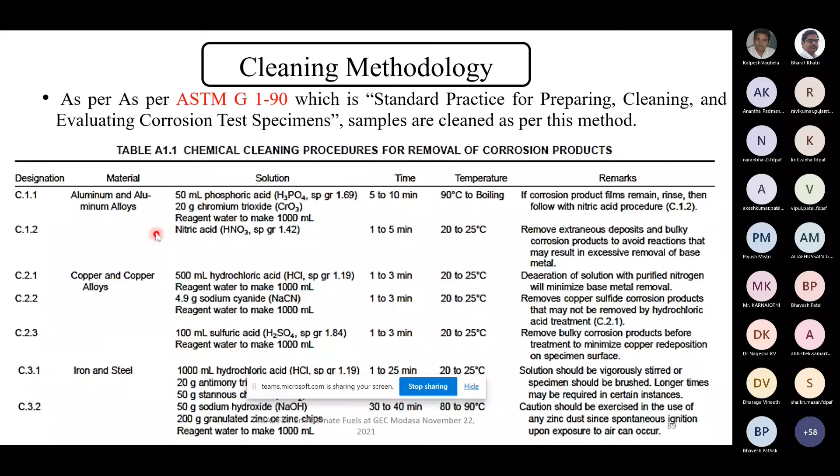In order to find out the weight loss, the cleaning methodology was adopted. So here it is as per ASTM G1-90. A clear-cut methodology is mentioned. We followed that. I'm not going into detail of this particular methodology. However, after that, we tested this. We calculated the corrosion rate as per ASTM G31-72 with this particular equation: weight loss into some K factor divided by alloy density, exposure area into exposure time. So exposure time was fixed at 150 days, which was taken into hours. So 150 into 24 is the total hours. Exposure area is same for all.

Only this weight loss will be evaluated. Before we dip this particular coin into the oil sample, weight was taken, and after 150 days, after cleaning, we took the weight. So that gave us the weight loss, or kind of the corrosion. So weight loss is typically corrosion: because of corrosion, how much weight is reduced. K factor is taken from the reference. So in ASTM G31-72 the use of this particular K factor is given, and from that we got the corrosion rate. So this is the picture of corrosion rate.

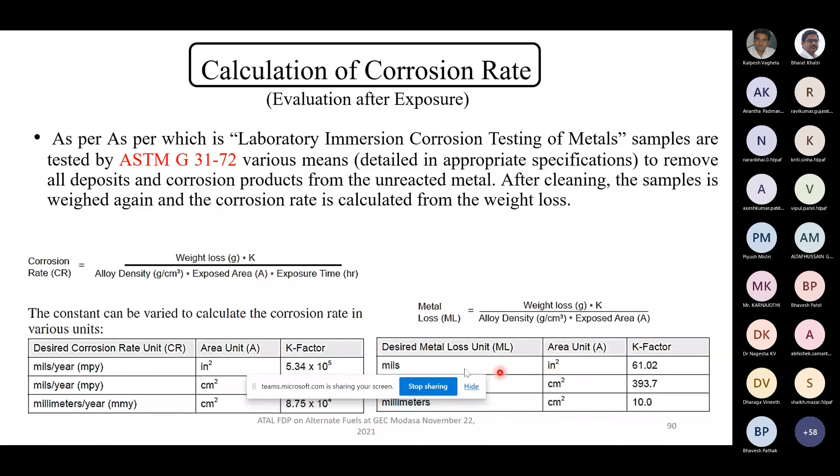Now see here, as far as bronze is concerned, maximum corrosion is obtained in oil sample 5. That is, bronze is more susceptible to karanja. Iron is also more susceptible to the same karanja. If you see the aluminum or copper, the wear rate was maximum with the biodiesel of karanja. If we see the second number, almost it is minimum in all. So that is castor. So castor oil could give you less corrosion. Maximum is with the Karanja, and second highest here I could see number 1, that is jatropha.

Here in this case number 7, which is palm. Here in this case number 8, which is canola, right? So from this particular slide, we can conclude that castor will give you minimum corrosion rate, and this rapeseed, number 6, if you see, right here rapeseed is minimum. Here also rapeseed, it is lower but not lowest, right? It is second lower. Here also, if you see the rapeseed, it is lower than many of these biodiesels. So if we mix, our optimized blend is castor rapeseed.

So this also corroborates our hypothesis that if you go for castor and rapeseed combination, not only performance but also in terms of the corrosion it will be better. So corrosion rate is much lower in this combination. If you go for castor and rapeseed, number 10, it is low. Here also it is low with respect to many. Here also it is less, here also it is less, and here also it is less. However, 9, diesel, is less, but next lowest is the 15% castor, 15% rapeseed.

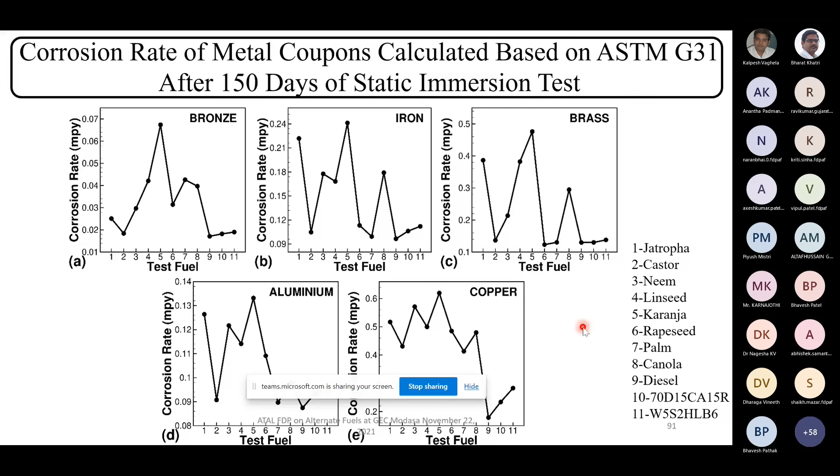We then further analyze this corrosion rate through SEM analysis, scanning electron microscope. So here, the main parts of the diesel engine fuel system exposed to diesel or biodiesel are the injection pump, injection nozzle, fuel filter, fuel transfer pump, fuel tank, etc. Typically all these components are made up of these 5 metals that we have discussed. So these 5 metals were selected for SEM analysis when they are exposed to diesel, Jatropha, Karanja, and rapeseed.

If you see this particular figure, in case of the Jatropha biodiesel, the fatty acid composition is almost similar to Karanja biodiesel. Looking at that particular table, the concentration of these fatty acids in Jatropha and Karanja was almost the same. So more or less it gives you a similar effect.

Now as far as corrosion is concerned, we can visualize 3 kinds of corrosion. Wherever I is written, it symbolizes intergranular corrosion, P symbolizes pitting corrosion, and D symbolizes de-alloying corrosion. The most general type of corrosion in all the samples, P, is common everywhere, which is pitting corrosion. It was observed that in almost all metal coins with all biodiesels, pitting corrosion, denoted by P, was observed.

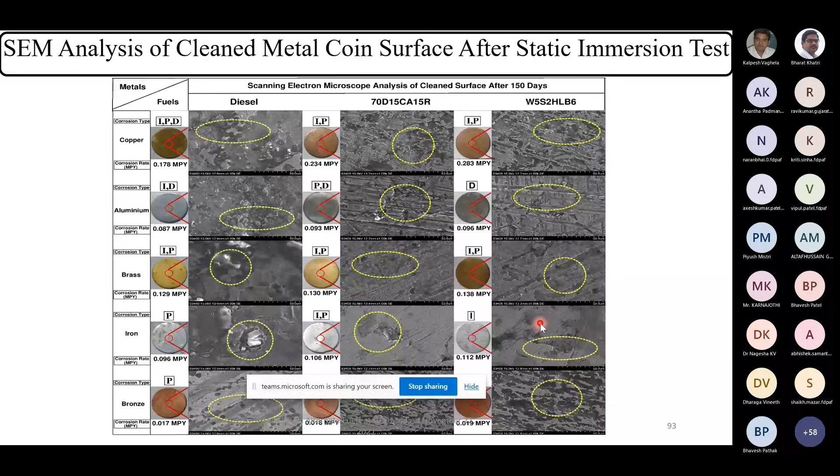So it could be either visualized physically from the physical appearance of your coins or from the microscopic analysis as well. And this is for the mixtures. So here also you can see this is in the range of 2 micrometer, right? 2 micrometer. Say in case of diesel it is 5, so it has gone down. So here 5, 5, and 10. So intermediate one is better. It is in line with diesel, but slightly more than that when you add water. If you have this blend and this water, in case of bronze it is better.

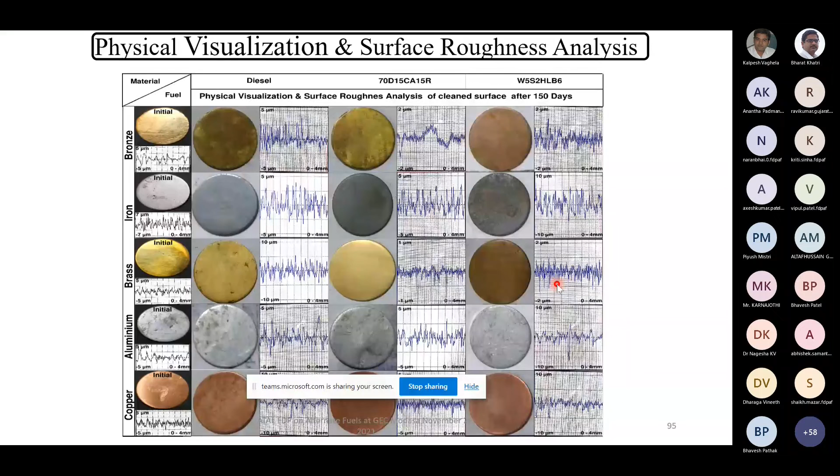So here if we go by magnitude, 2 micrometer to 5 micrometer, it was taken on 4 millimeter length. So over 4 millimeter length, 5 micrometer is nothing. So corrosion happens, but it is not that significant. Only comparatively I can say that yes, diesel is best. Next best is your biodiesel blend, and when we add water, it goes up slightly. So this is your surface analysis. Same results are plotted on graph so that we can visualize in a better way.

So here again, we have taken all 11 combinations, all 11 samples, and you can see that for almost all, 2, 3, here also 2, 3, and here also. So as far as bronze, brass, and copper is concerned, castor and neem are better. Worst in any case is number 8. If you take number 8, that is for bronze, canola gives you more wear. For iron, number 5, that is Karanja, and number 7, which is palm. Karanja and palm are the biodiesels which will corrode the metal iron more.

In case of brass, number 9, that is diesel, is the maximum. You can see here, right? Whereas the others are less. In case of aluminium, number 3, that is your neem, is worse, and copper, number 8, is better. So looking at this, if you compare the roughness value, in case of copper, on the scale it is between 0.6 to 1.5 micrometer, and here it is in the range of 0.2 to 0.8 micrometer, which is less as compared to this.

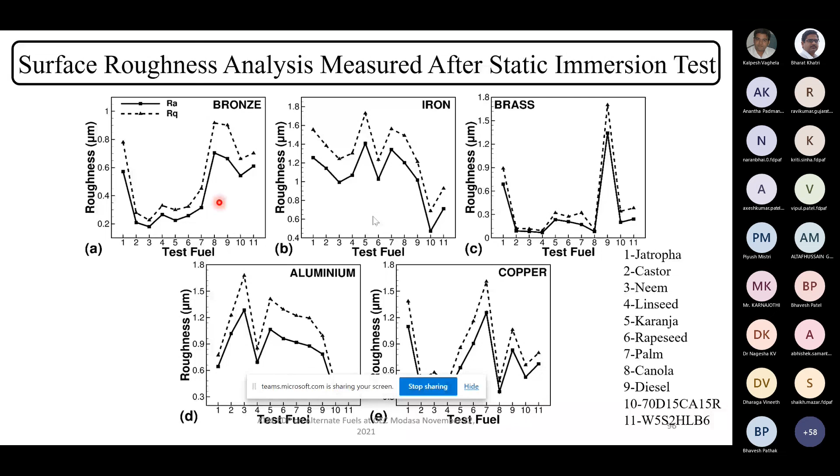So copper gets more corrosion as compared to bronze. Iron is also more because here you can see it is up to 1.6, right? Aluminum is also more, but in case of brass and bronze, this effect is visualized less. So the conclusion is the result of the corrosive effect of 8 biodiesel optimum blends and emulsified fuel blends on the different metal surfaces and the elastomer. The castor rapeseed biodiesel based optimum blend and emulsified fuel blend showed the best compromise result.

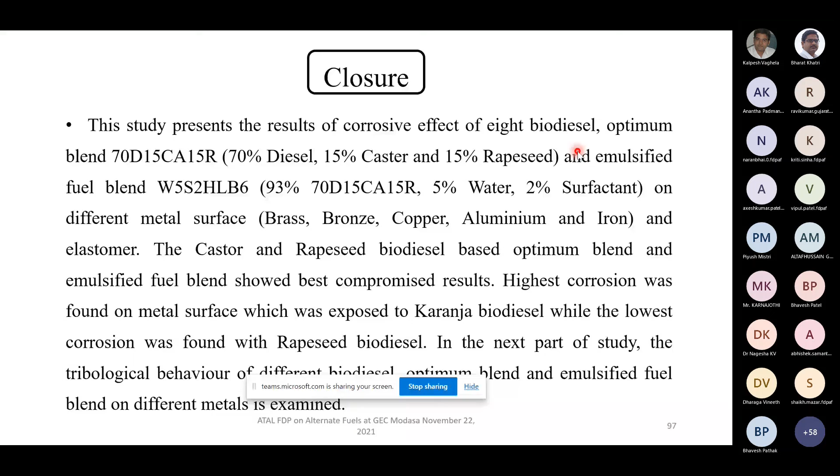Highest corrosion was found on the metal surface which was exposed to Karanja biodiesel, while the lowest was found with the rapeseed biodiesel. So that's why our selection of rapeseed castor in terms of this is also best. We proved it on the basis of performance analysis, combustion analysis, and emission analysis as well. So in terms of the wear also it is found to be optimum. Now, as time does not permit me, I'll skip this tribological or wear test, which is in line with the corrosion. I'll only highlight the last part of the result here.

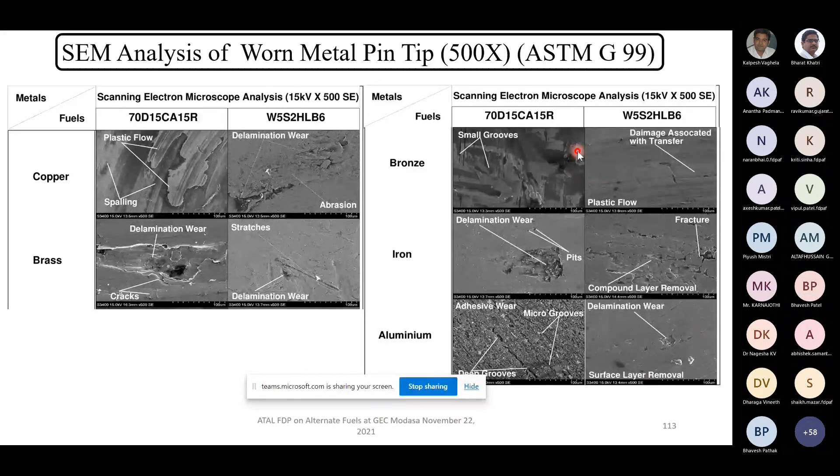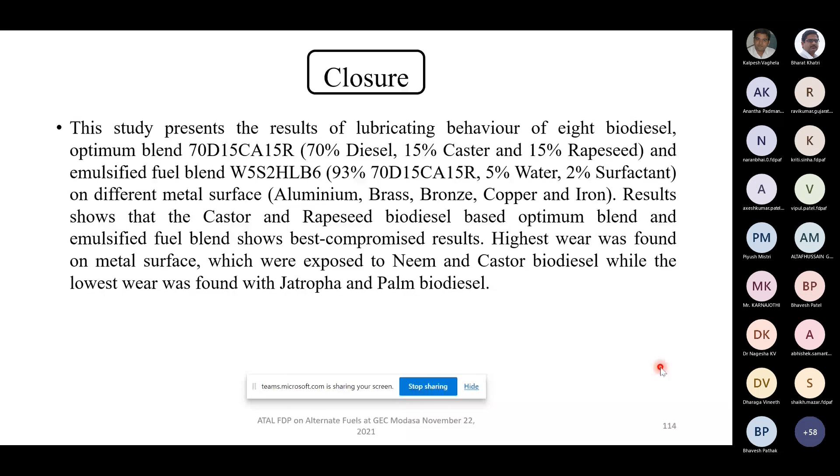So, in conclusion, whatever we have discussed is listed here. In the first part, through MCDM, we went for TOPSIS and PROMETHEE analysis, and the conclusion was 15% Castor, 15% Rapeseed, along with 70% diesel was the optimum blend.

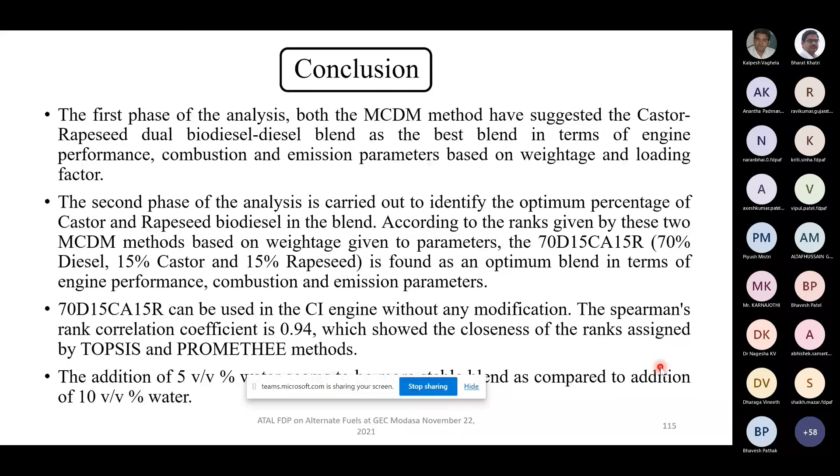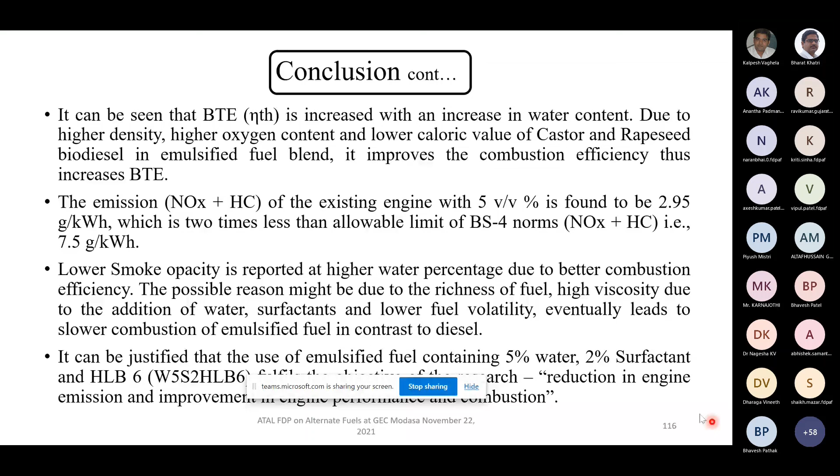Then we also evaluated in terms of brake thermal efficiency, emission, lower smoke opacity, and water emulsion. In water emulsion, the base blend was found to be 5% water with 2% surfactant. Then this particular blend was observed for GCMS and FTIR.

And finally, through wear, we concluded that in terms of corrosion, our Rapeseed-Castor blend is best, and in terms of wear, it is the best compromise blend. So finally, looking at all these 4 criteria, ultimately the contribution of this research is that rather than going for one particular biodiesel with diesel, you can select 2 or more. However, here we went for 2, but you can go for a 3-biodiesel mixture as well, and come out with the best optimized blend. That will reduce the dependency on one particular biodiesel.

So we know ultimately biodiesel are obtained through crops, and crops are seasonal. It may happen that in one particular season, even Jatropha, if it is available in winter, you need to either store this Jatropha biodiesel for summer application, and we know that its viscosity is time dependent - for all these biodiesels, as you store them, the viscosity increases with time, and that is not a good part. So at that time, in summertime, if you identify other biodiesel, or blend it, you can take the advantage of the good properties of 2 biodiesels.

So ultimately, our intention here is to propose that if we mix these 2 biodiesels in diesel, not only performance but also emission and combustion properties improve. And if we make it mandatory to mix a portion of biodiesel in diesel for all applications over India, our dependency on, or rather the money we spend buying petrol and diesel, we can save that part. You can contribute to GDP by giving employment to farmers. Farmers will also earn through this seed farming. In a way, this is the major contribution of this particular study.